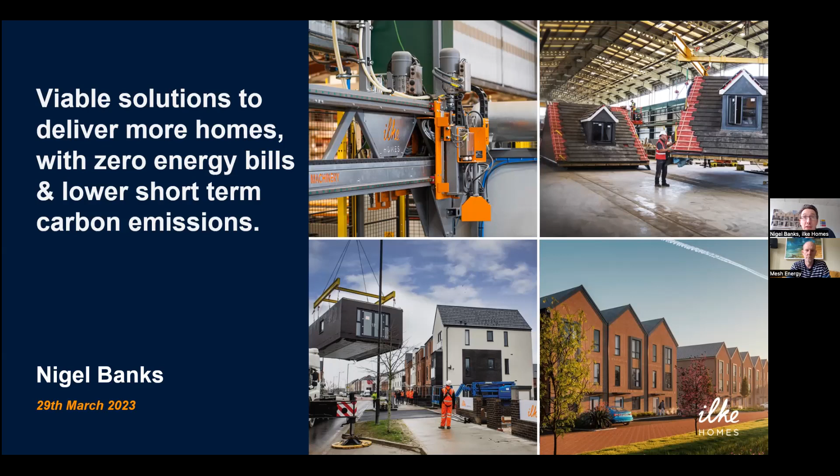So the topic there around viable solutions for more homes with zero bills and lower short term emissions is really around trying to look at it in a fairly holistic way. I think often I and others have probably been a bit carbon pigeonholed, and we are facing a really broad set of challenges or crises or emergencies, whether it be climate, housing, biodiversity, health, inequality, skills and trades and affordability and viability, and not got answers to all of these,

But one of the reasons I moved from consulting into main contracting and now at Ilke is the ability to try and scale things up and make a difference. I was a bit fed up of working on massive projects in the Middle East that didn't make much of a difference here and wanted to make a big impact. So that's what I'm going to try and cover, hopefully showing some ideas around that topic and showing some challenge on some of those as well.

So I think the first challenge is why do we need more homes? And I think there's a carbon argument to say we don't need more homes because more homes means more carbon generally. But there was an interesting article in the FT by John Burn-Murdoch, who's done some great infographics on the number of homes per 1,000 people in the UK and other Anglophone countries, which is quite a long way behind other European countries. And some of the outcomes of that is a shortage of housing, which drives up pricing, both in private sale and in rent.

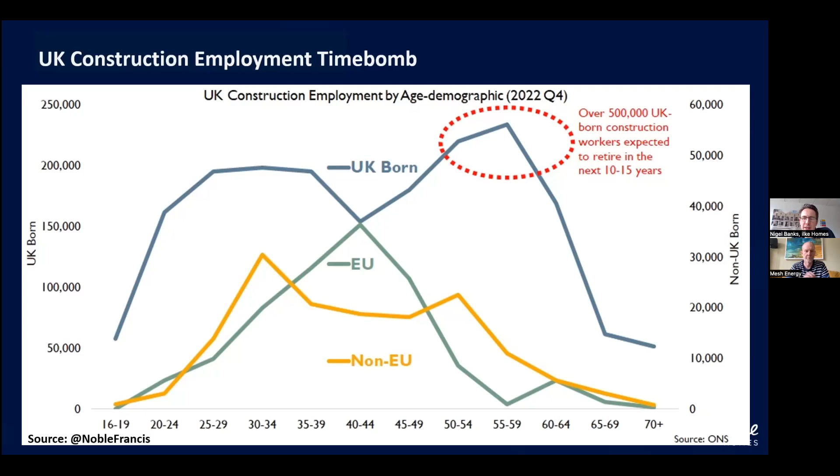But interestingly, it isn't the 50s and 60-year-olds that are leaving the industry. It's the 40-year-olds and early 50-year-olds that are generally leaving the industry in quite significant numbers. And we're not replacing them with EU workers anymore, and not replacing them yet with non-EU workers. So as a result of that, we have got a shrinking demographic of construction skills.

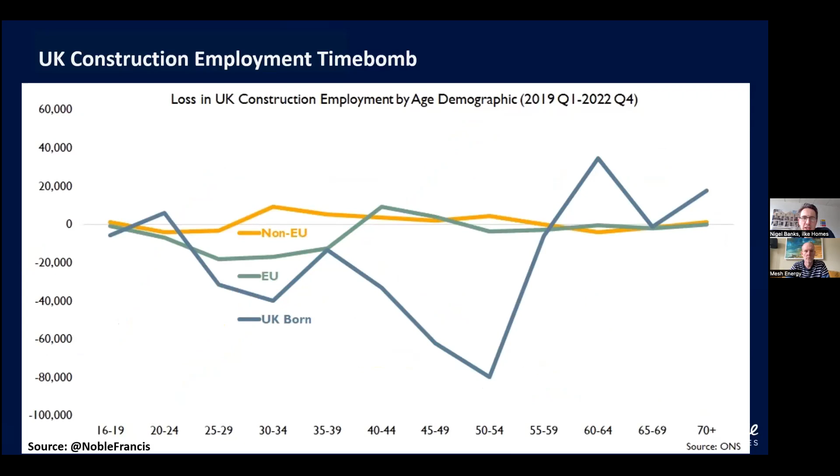And the other key thing that we look at in ilke is particularly the gender diversity. Currently, we're fishing in half the population pool for skilled trades, plant operatives, and other elementary occupations, and less than 2% of those in the current construction workforce are female. So that's a real challenge.

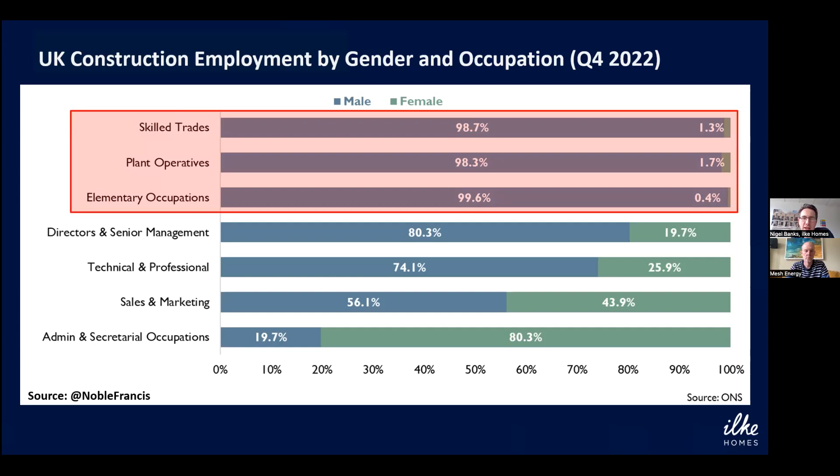So I think we need to build more homes, but we need to build more homes and recruit more people in the industry, and we need to do it in a way that's attractive. And that's one of the main reasons we set up ilke in the first place. So I've got a little bit about ilke and what we're doing on that, and then I'm going to go on to zero bills and embodied carbon.

So if you're not familiar with the ilke business, I'm based at the factory in the top left picture there, in North Yorkshire. We're currently producing 4 homes a day, so it's equivalent to 1,000 homes a year. We only started 5 years ago, and we now have over 1,100 employees in the business. And 95% of the roles in the manufacturing who are building the homes have got no trade background, so a really diverse labour pool. So we're not taking people from construction sites and putting them in the shed to build houses. We are manufacturing and bringing people from a really diverse set of backgrounds, and I'll cover some of that.

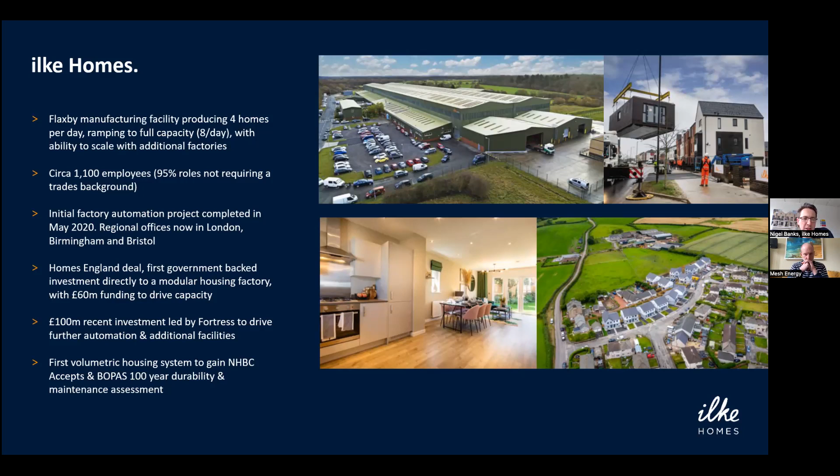And another key thing was around getting accreditations. Getting modular accredited is very difficult. Happy to pick up any questions around that, but we were the first to get NHBC Accepts, and BOPAS do a standard 60-year assessment, and we asked them to do, and we're the only ones to have, a 100-year durability and maintenance assessment. So this little fly-through hopefully will give you a bit of a feel for what we do at the business and why we're doing things differently and how we do things differently.

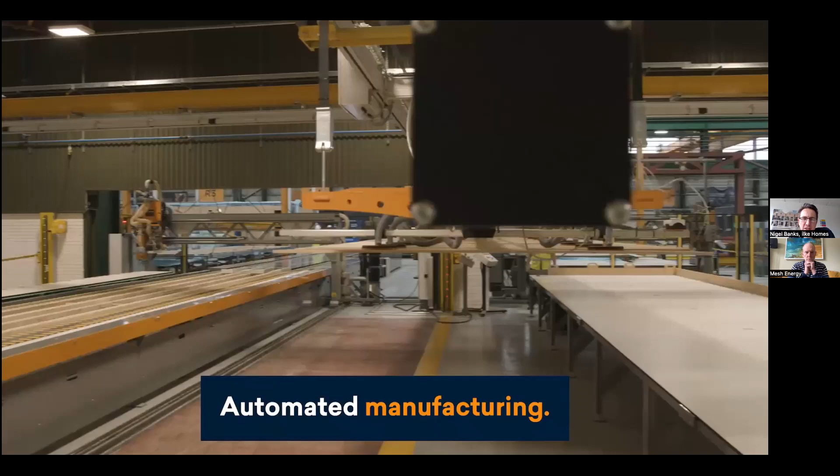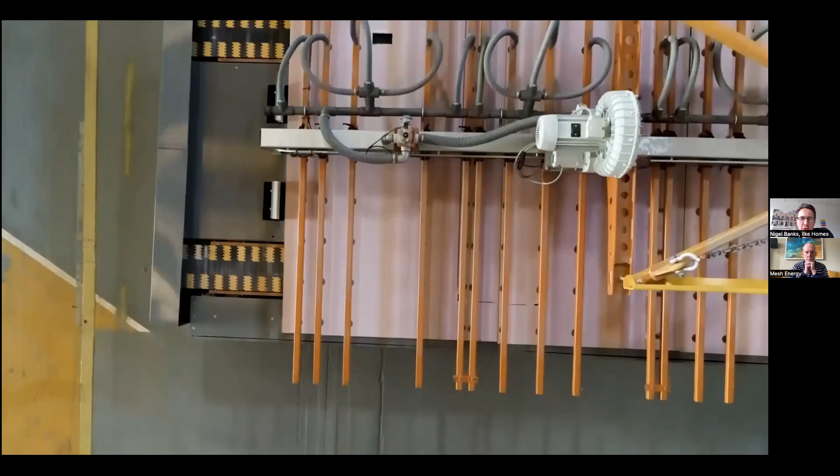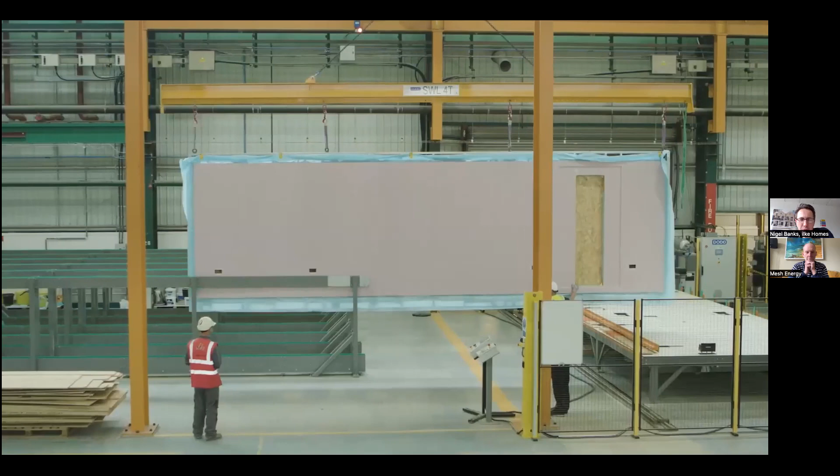So we've got a big in-house design team that are developing a portfolio of house types. We currently have 9 house types which we use on our sites. We have some automation. People from the construction world think this is fairly good. People from the manufacturing world think this is 1990s kit, and it is, but adapted for the size and scale of components that we're making. So generally, we have a reasonably high level of automation on some key components and sub-assemblies. So we make full wall panels, as you can see there. That's a party wall panel.

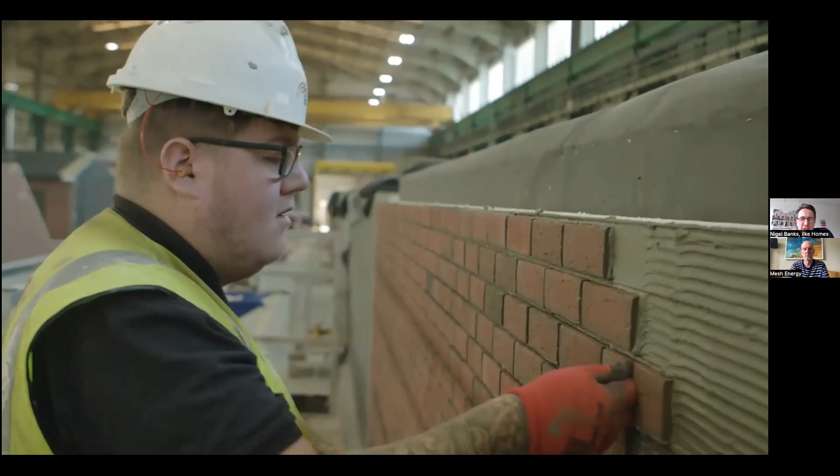We use a galvanized cold rolled steel frame, and it's a full modular category 1, so full 3D volumetric. We still have some fairly manual processes in the factory, including adding finishes, brick slips or render in the factory. So we finish the homes as far as we think is possible, both inside and out. So external finishes, bathrooms, radiators, all tested, kitchens fitted in the factory. So it leaves minimal work to do on site.

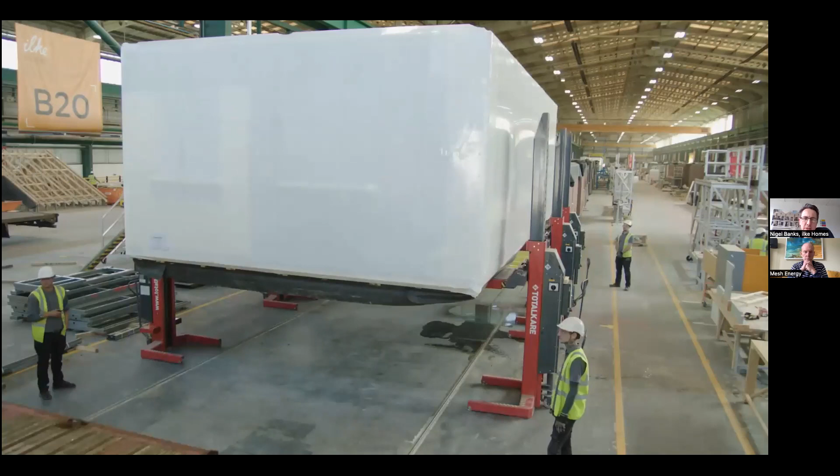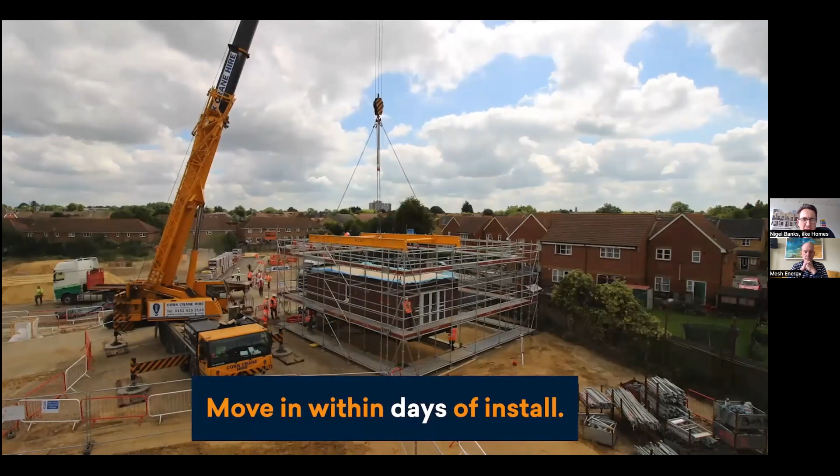So we're about 85% PMV, if you're in the world of understanding that, and most of what's left is the foundation and groundworks. So the modules are then transported to site, and the install process is done with a mobile crane. This is some of the early sites in 2018. We have a module per floor. So this is a pair of semi-detached, I think they're 3-bedroom houses in Kent.

And within a couple of weeks, you've got a finished home. So that's the process we go through. And because we're manufacturing homes rather than using construction skills, we've got a very different workforce. So we very much see this as a manufacturing facility, not a construction site.

At 2,000 homes a year, which is our full capacity, that is the equivalent of 40 or 50 main house builder sites, in terms of typically a main house builder would do 1 house a week. We'll be doing 40 or 50 houses a week at full capacity. And we're currently doing 20 houses a week. So about equivalent of probably about 20 main house builder sites in one location.

There's a lot of benefits around people coming to the same location, employing people locally. There is clearly vehicle travel to get to the site, and from the factory to the construction site. But that's generally local people rather than people traveling, which the construction trades tend to do more.

So we now have a great team of people with a really diverse set of backgrounds. We've got people who used to work in call centres, people who used to work in retail, we've got a former nun who is now doing finishing works. So a really diverse set of backgrounds, and really proud that we're already up to about 18% women on the construction workforce in terms of building the homes.

And a short-term target to get to 30%, with an ultimate aim of getting that up to 50%. And we think that is achievable in the next decade to get to 50%, whereas we don't think it's probably that achievable in the construction sector.

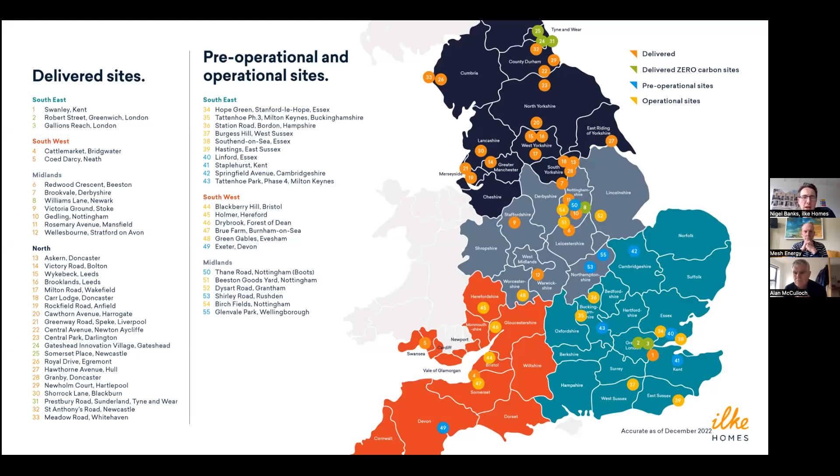We've built across the country, and we're building for major house builders where we supply the superstructures. We're building for housing associations, and this is one of the recent schemes. So the homes hopefully look like a good quality new build housing scheme, and not a temporary prefab. This is permanent housing built to a high quality.

And then we're also building for institutional investors, the likes of Gresham House and Man Group. And the houses on the right there are our first zero bill homes, which have just been occupied.

So why did we go for zero bills, and why have we set that as a standard, and why do we think that is something which the industry should be adopting, perhaps in lieu of something like the Passivhaus standard? And I'll perhaps come into that, and that's probably where we'll get some discussion.

So look, energy bills have gone up. If you look at the top line, from £1,000 to £2,500, they may drop down to £2,000 later this year. And depending on how well insulated your house is, an existing house can be a lot higher than that. New build houses typically are better on heating, but are pretty similar on electricity and hot water usage to an existing house, and that's generally where the difference occurs.

Solar PV can help with bills, and people who've got solar systems that are working would generally say that does deliver a good benefit. But the areas we started to look at was how do we get lower than that, and we did an option study about 2 years ago saying how low could we go with bills, and realised that with a good fabric spec, heat pumps, PV, battery, and smart controls, we think we could get to zero bills.

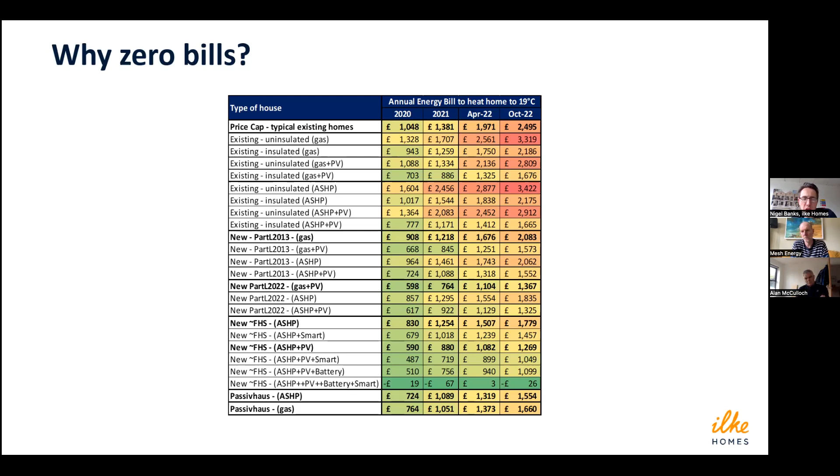That was a concept that we launched in 2021, a vision that by 2030 we'd only build zero carbon homes with zero bills, and we'd try and do that at zero extra cost by 2030. We knew we could do zero carbon in operation, because we'd done some sites that had delivered that in theory and in practice in terms of some of the monitoring data. I'll come back to embodied carbon. But zero bills was an idea, and we worked that idea up.

We spoke to a lot of utilities and ended up working with Octopus. So Octopus Energy have now created a zero bills tariff that is available to homes that they accredit having the right equipment and the right fabric standards to deliver a guaranteed zero bill. So they will guarantee zero energy bill, no standing charge, as long as you build a house to a certain specification.

There are some T's and C's. There is a cap on usage. It's more than a fair use. It's probably an excessive usage cap, and it excludes electric vehicle charging. But effectively, you need solar PV, and quite a lot of it, a good fabric spec, electric heating.

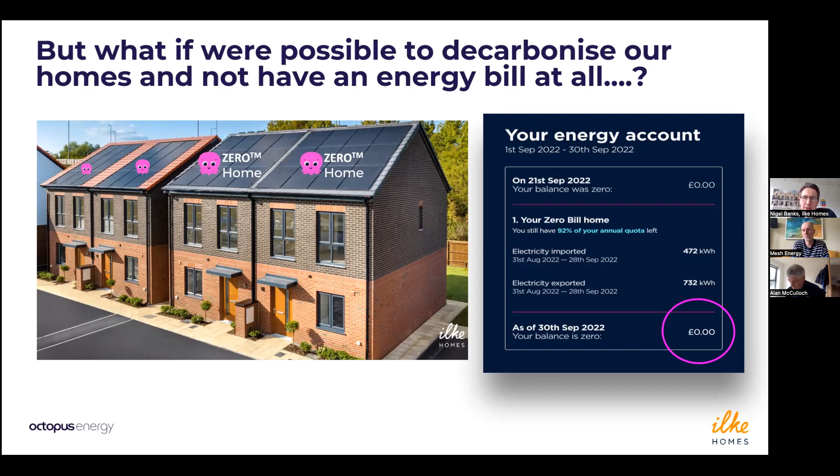If you haven't got a heat pump, you need to go further with your fabric, and battery storage. And effectively, Octopus control the battery and the heat pump based on the temperature settings that the customer does and lives normally, and they do the rest of it and can get the home to deliver a zero bill.

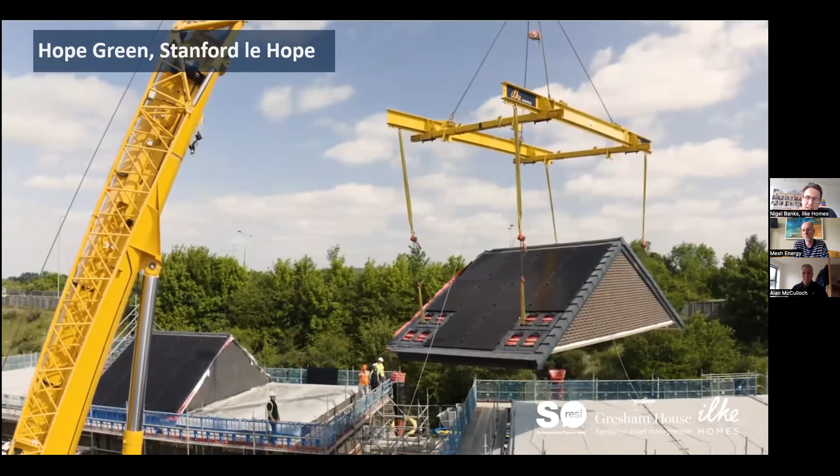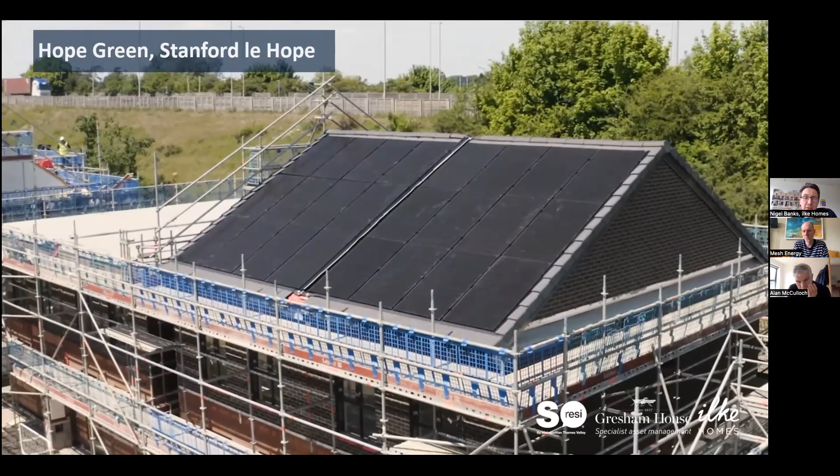So we've now delivered our first zero bills last year, and they've now just been occupied. And we're now getting the data back on the first homes that are performing in line with expectations. We built 2 on the first phase of this site, Hope Green in Stanford le Hope. We've now got 22 on this site that is upgraded to zero bills, and we've got about 150 in our pipeline to build in the next sort of 18 months or so. So starting to get some real momentum.

A really interesting point around this is around viability. So typically our zero carbon spec, and when I was previously at Keepmoat, we built a zero carbon home, or code 6, next to a code 3 home, and they sold for the same price because people weren't able to borrow more money to buy a higher performing home. The mortgage rate was the same. There are some lenders offering an A or B rated home or a Passivhaus home with a slight discount or a cashback incentive, but fundamentally you couldn't borrow £20,000-30,000 more to pay the uplift for some of the equipment that was going in at that time.

What we found now and are finding on sites going forward is on shared ownership and private sale and on private rent, you can charge a higher price and you can borrow more money to do that. When you do your affordability check for your mortgage, instead of putting £2,000 a year of energy bills in, you put 0 in, which unlocks £30,000-40,000 of extra borrowing capacity that wouldn't otherwise be there. So you can't use it to buy a bigger house. You can't use it to buy an upgraded kitchen, but you can use it to buy an upgraded energy spec.

But the guarantee on the zero bill is really important. And the reason zero is important, rather than doing a fixed price, is if energy prices go up or down, they net to zero on the zero bills. And so it's kind of market agnostic. So Octopus can have confidence if the price goes up a lot, they'll be able to export for the same amount as they import and get to a net zero position again on price. And likewise, if the costs do come down, they can do that. If it was a guaranteed half price bill, that's harder for them to do.

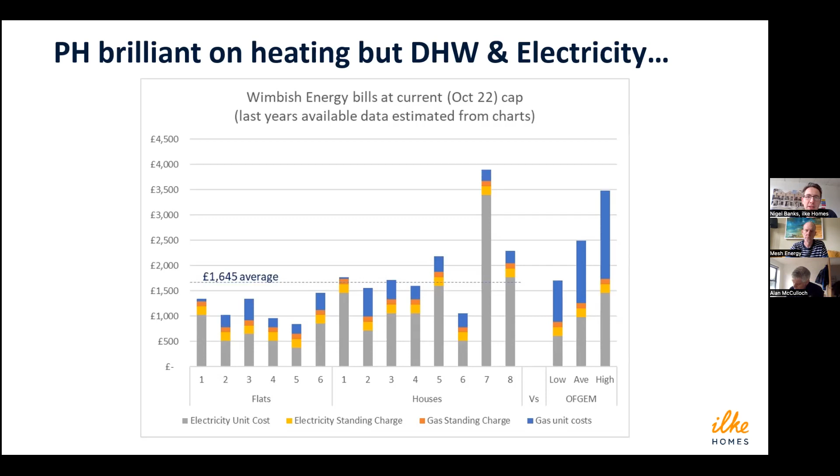So they haven't tackled the electricity use. And actually, when you look at a bill now on a new build house, even a new build to the current standards built not that well, hot water and electricity usage is the biggest part of the bill, much more so than the heating. Whereas on an existing home, absolutely heating is important. So trying to combine a good fabric with the other technologies is where we think is the best way of getting to a zero bill.

But absolutely recognise by doing that, you're adding quite a lot of embodied carbon, and that's the natural criticism that comes the way of adding more kit. But look, we are focused on trying to work out how do we do that. And the fundamental issue we've got is we've got to come up with solutions that reduce emissions in the short term. 60-year whole life carbon assessments, not really interested in, because that takes you out to 2080. By then, we've spent the carbon budgets we've got.

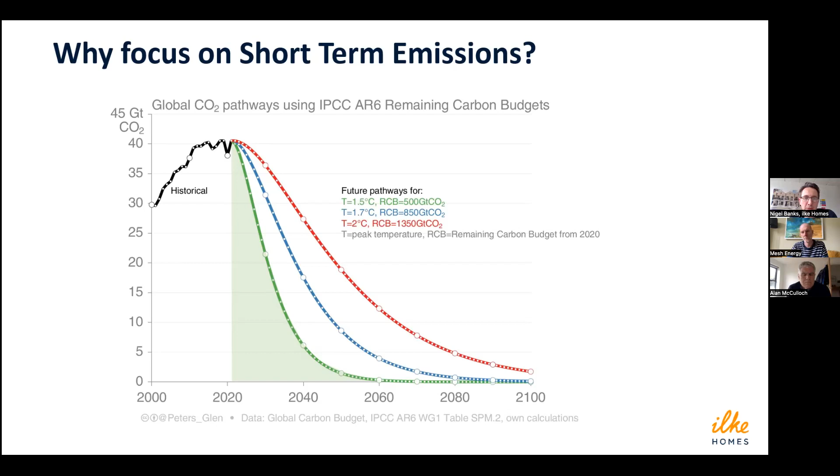We've got to come up with solutions that are lower carbon soon and lower carbon in the short term. And some of the things that are a bit counterintuitive start to come forward as a result of that. One of which is around choice of structural materials. This is an excellent paper from the IStructE journal that if anyone hasn't read it, it's worth reading.

And it looks at the embodied carbon of different systems and understanding how important it is to be designing efficiently and not wastefully, irrespective of your material choice. So this compares over time. It's a sort of 100-year time cycle. So where it all jumps up on the sort of 2/3 of the way across, that's at 60 years.

But the bit it points out is in a timber structure, you have got high embodied carbon at day one, and the trees that are planted that replace that tree absorb carbon out of the atmosphere over the next 40, 50 years and get down to a negative or neutral point of view. But what happens at end of life with timber also has a big impact.

And timber used wastefully, and one of the things that I see, which I think is wasteful use of timber, is CLT in a 2-story structure. You need a stud every 600 mil, not a continuous 90 mil panel on a house. So some of that stuff feels to me that it's unnecessary use of material, which has a carbon footprint. I don't think the biogenic is a long-term benefit.

And if you overlay that green bar, the time we've got over the next 20 years to reduce carbon emissions is done through reducing the amount of materials used and trying to look at alternative materials that are low carbon in the short term. And in my mind, timber, steel, concrete all have high embodied carbon in the short term. It's worth having a read of the paper if you haven't seen that.

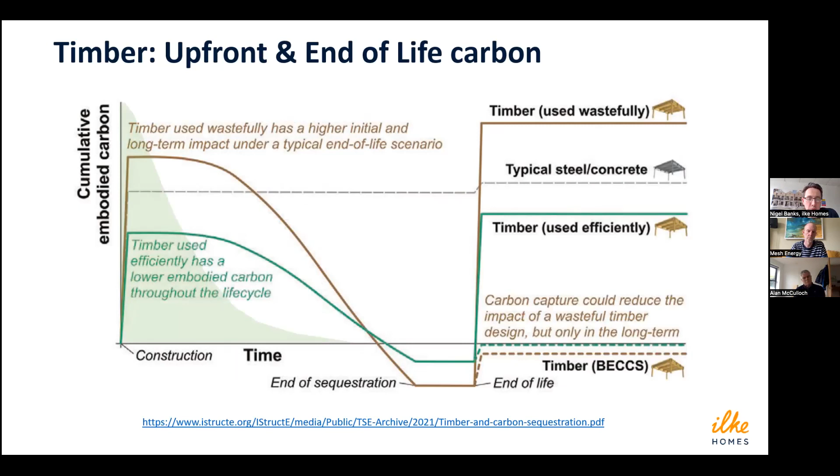So we've done a lot of work on minimising our materials. This is a bit of work done by the Future Homes Hub and Verco in their latest report on embodied carbon. And they've got, I think, about 40 data points from different house builders, timber frame, brick and block, and we put in our steel frame houses and compared the upfront and embodied carbon over a life cycle basis on different homes. And our homes were coming out some of the lowest upfront carbon of the different portfolio of types.

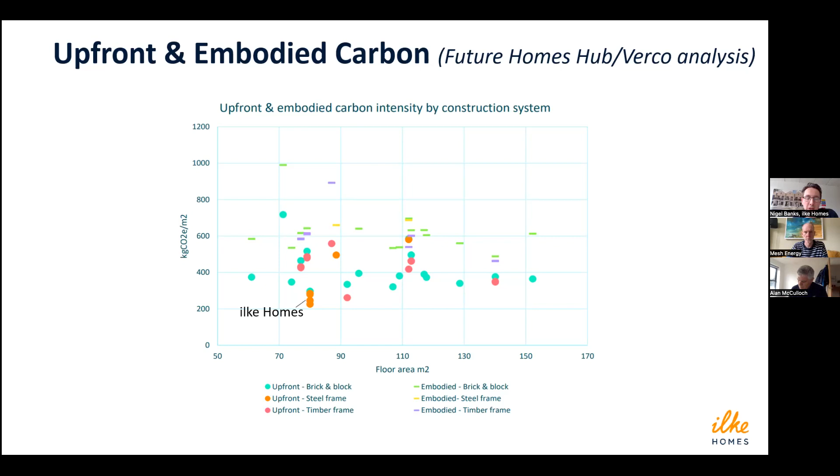Not saying you can't do better, but we're starting from a good position, having done a huge amount of work on material efficiency, and we've reduced our emissions by about a third since we started in 2017 on upfront carbon by designing out unnecessary components and lots of physical testing and optimization to achieve that. But we've got a long way to go.

One of the other reasons I don't think going towards a Passivhaus spec at the moment makes a lot of sense on an embodied carbon argument. So the Passivhaus Trust report shows a significant uplift in material use when you go to Passivhaus from building regs. Sort of doubling of insulation material doubles the embodied carbon in that insulation. I think the argument was that overall it was still better.

And I have challenged that with the authors, and they've got different window assumptions and different heat pump assumptions, which if you equal those out, which I think they should be, because you should have timber in both for window frames, and it's the same size heat pump required in both because it's the hot water demand that's driving it, you get a quite different answer, and the extra MVHR and insulation will increase embodied carbon over the life cycle.

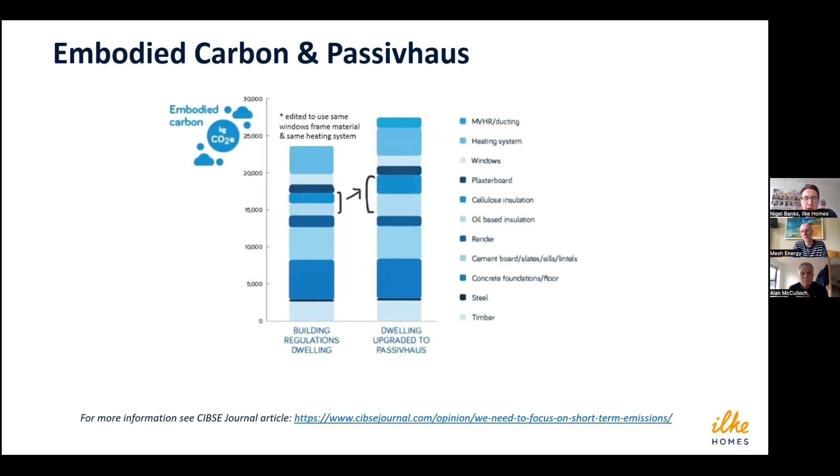And if you've got a heat pump providing the operational carbon, you don't get that carbon back. You don't make the savings. The savings don't recoup that extra over carbon ever. Not over 20 years. Not ever. Because the grid is going to zero carbon very quickly. And I've published some paper on that in the CIBSE journal if people are interested in understanding some of that.

So where we're getting to in terms of our design philosophy is, look, good design, good quality should be fundamental and isn't fundamental. And I think a lot of the reasons why people are saying Passivhaus doesn't cost more is because it isn't designed as efficiently as or built in as cost-effective a way as it could be.

If you take a standard house builder house and make it to Passivhaus, you'll add cost if you don't do anything else. If you can design it out to be more efficient, great, but you could also design that house builder house to be more efficient as well in terms of its material usage or glazing percentages or footprint or simplicity of fabric. So there is a balance around cost and carbon, and one of the issues that I see is more insulation, going to triple glazing rather than double, increases carbon, increases deliveries, increases cost.

And if you're a housing association with a fixed budget, that means you'll build fewer houses or you'll retrofit fewer houses. But I acknowledge there are some co-benefits of potential health, air quality, etc. in a Passivhaus spec, but then that could be achieved in a well-designed non-Passivhaus spec. And I think there's an interesting balance to be had.

But one of the reasons we've looked at some of the more active technologies is the cost has moved in our direction. And also there's an interesting paper shown here around the cost of the lower carbon materials. And one of the real issues there is low carbon generally equals high cost. And so on cavity wall, some of the lowest carbon are the highest cost and some of the highest carbon are the lowest costs. There are some materials which are pretty good in both embodied carbon and costs, like EPS or lime stucco, but generally low carbon equals high cost.

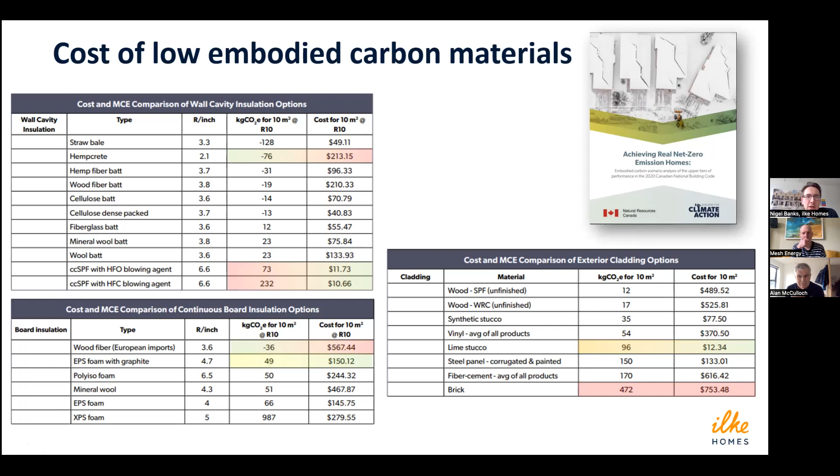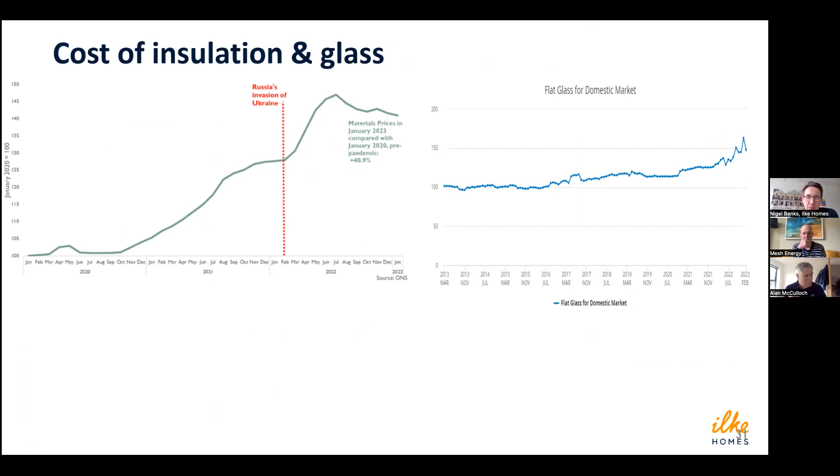And there's some things which are high carbon and high cost, like brick, and we should be looking at alternatives. But the embodied carbon of materials is a really interesting challenge. But from the cost point of view, insulation and glass have gone up massively in the last few years, which has made this problem even more exacerbated. So there's a carbon challenge, but insulation products have gone up 40% in the last year. So from a cost point of view, that diminishing returns from a carbon, I would argue, isn't there.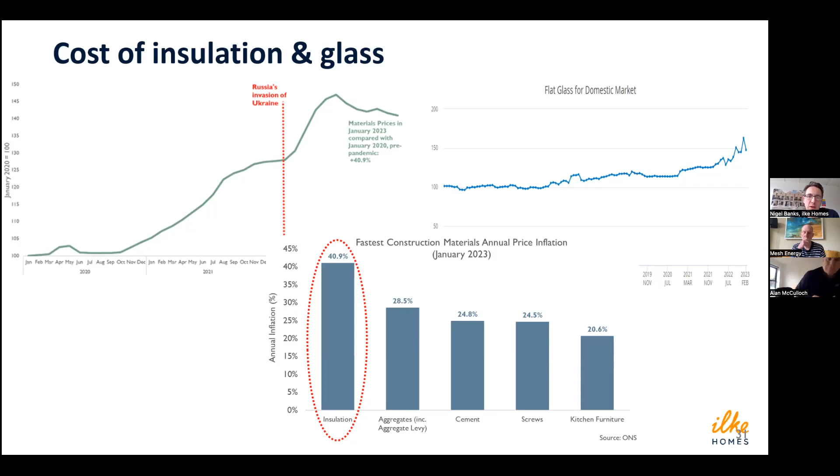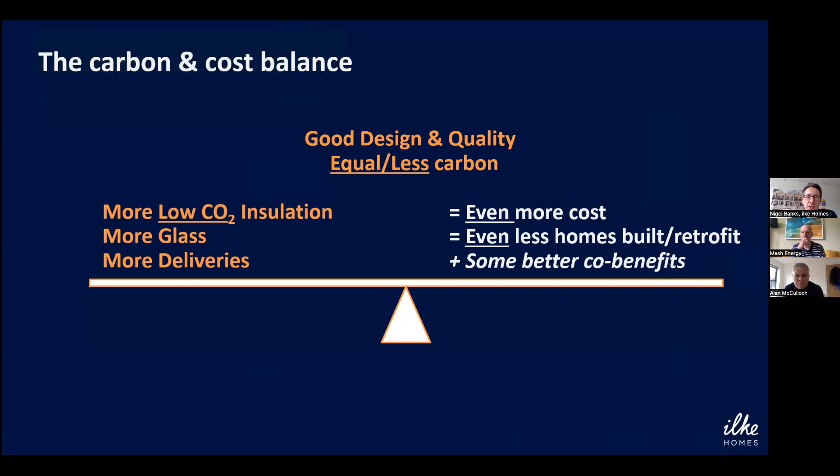And I think the diminishing returns of going from 150 mil cavities to 250 mil cavities on a house or a bungalow, I don't think the carbon or the cost can currently justify itself. Quality and design and efficiency and using less material, I think, makes more sense at the moment. So if the solution is going to lower carbon materials to try and offset the fact that you need more of it, you've got even more cost, which potentially means even fewer homes being built or retrofitted. So there's a real dilemma there, and that's why I think there's a sensible, nuanced position, which is a good level of design, a good level of engineering, a good level of insulation, but perhaps not going as far as you can, as some people are advocating.

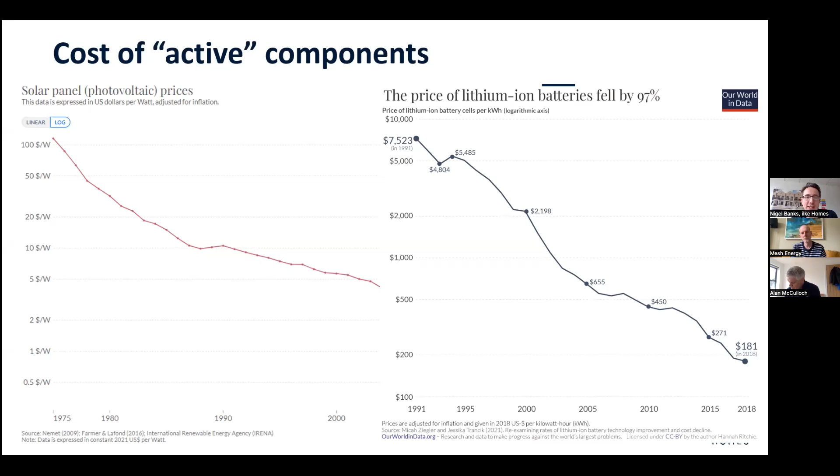On the counter side to that, why do I still think it's worth the embodied carbon and the cost of the active components? The active components costs have come down massively, while some of the other products have been counter-inflationary. And although there was a bit of a rise last year on PV, it's come back down again this year. So we're about a third cheaper than pre-pandemic prices on PV. And battery prices continue to fall significantly. So that is getting cheaper while the cost of some of the insulation and the trades to fit that has gone up. So on the cost point of view, I think that is still making more sense. And the payback is there on a capex versus payback on a cash point of view.

And there's an argument around the carbon point of view, that we will need to build a lot more solar in the UK as part of the balanced pathway, and building that on houses where the roof provides the frame rather than having to build a steel frame, for me makes sense, and it's used directly in the area rather than being in a remote solar farm, and has the benefits to the householders rather than being benefits to some solar developers.

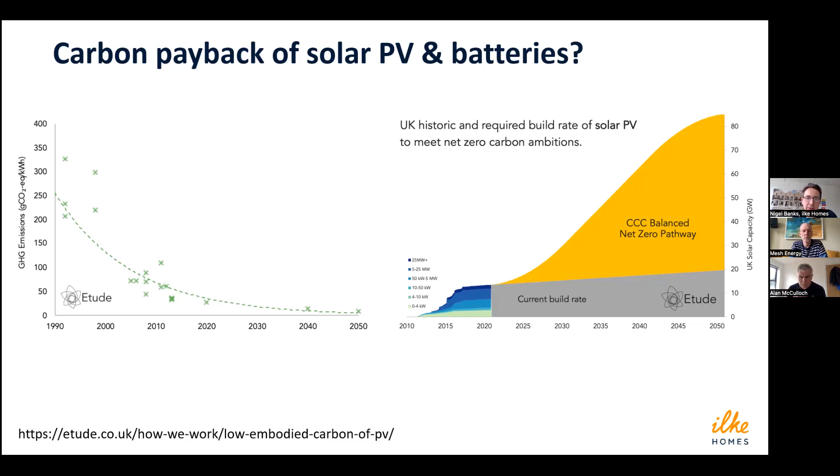And we've done some analysis to say, does the carbon pay back on PV, even with a decarbonising grid? And this is the sort of analysis we've done on insulation and other products as well. And we're seeing that upfront carbon does pay back on PV and battery combined. And over time, the replacement battery, the replacement inverter should be lower carbon, and hopefully the embodied carbon in the materials will also drop. There may be a point where that doesn't make sense, as the grid goes really low carbon, but hopefully we will have some lower carbon ways of shipping and other solutions to some of those challenges by then.

So this is my last slide, I think. So in summary, hopefully that's provided some interesting, thought-provoking ideas. So fundamentally, I think we should be focusing on good design, simplicity, wherever we can, to reduce and use good engineering to make efficient structures that are low upfront carbon, zero operational carbon. And we do need to be looking at some of those other materials, but if they are costing 3, 4, 5, 10 times as much, that isn't going to be viable.

One thing I do think Passivhaus does brilliantly, and the whole industry needs to get behind, is the quality control approach from Passivhaus. So building it right, commissioning it, testing it, not substituting materials, not cutting corners, getting good designs, getting good details. That bit of Passivhaus I think is brilliant and should be adopted across the industry.

Going from 150 to 250 to 300 mil insulation in wall cavities or external insulation doesn't feel right from an embodied or cost perspective. Performance monitoring: we're getting some great data back on our zero bills homes to actually understand how they're performing, how they're working. There's been a huge amount of homes built, in theory performing well, that we don't know if they are performing well, and it is the only way to get that feedback.

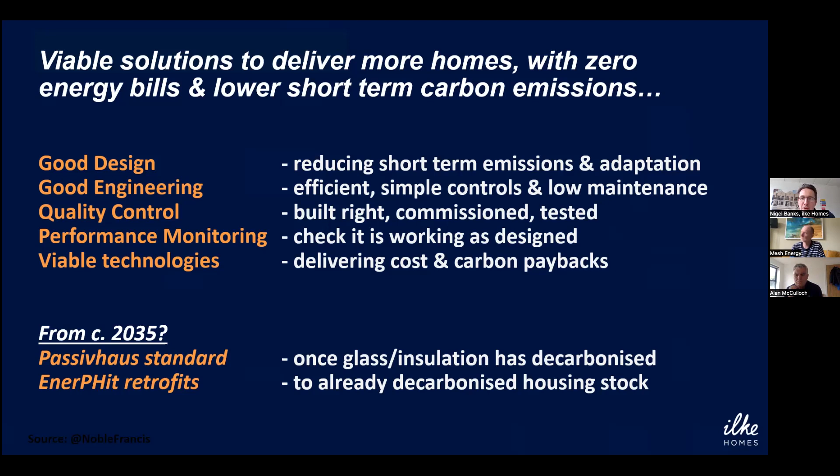But at the moment, my philosophy is it doesn't make sense to go that far, and I think that's something which people should have a think about and see if they agree. So I hope that will provoke some thought and some discussion, and I'll finish it there for that discussion.

So thank you, Nigel. Yeah, very interesting. I mean, I like the nuanced approach. Seems realistic, especially for me. People who attend these webinars know that I'm a facilitator. I'm not a specialist. I'm not an expert in sustainability.

So what appeals to me is something like zero bills, where, as a consumer, as a homeowner, the prospect of zero bills means that by virtue of wanting to live in a house with zero bills, we are then addressing the carbon issue as well. It's like we're not banging someone over the head. We're not constantly talking about, you need to fill out these forms, you can apply for a solar grant, blah, blah, blah, and you might get the money afterwards. Essentially with this, it's seamless. So you've devised a model whereby people want to live in a low carbon home because it makes commercial sense. That's the big driver.

We think. Well, I'm interested in zero carbon. I bet the people on the call are probably interested in zero carbon. Sure they are. Of course they are. Most people probably aren't, but they are interested in having zero bills, so we think it's a much better consumer proposition. So, Octopus have launched that tariff to other suppliers, other developers now. So any house builder or client group, if you just Google Octopus Zero Bills, there's a web page with FAQs, and get in touch with them.